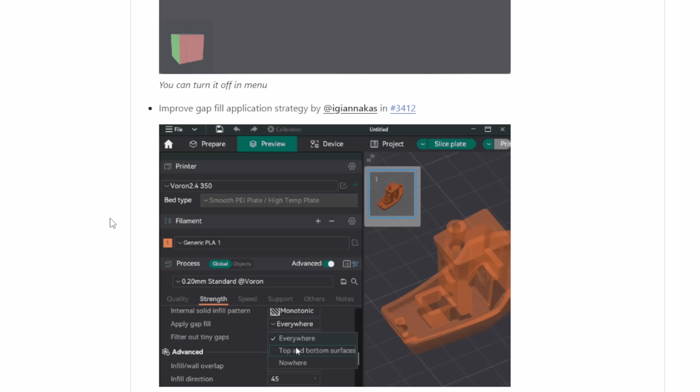So this is a first. We're doing Orca Slicer. If you don't know what Orca Slicer is, well, I hope you know what a slicer is. If you don't, it slices your models for 3D printing.

So you put an STL file in and it turns that into G-code for your printer. Time was, if we go back far enough, we have something called Slic3r, which then became Prusa Slicer when Prusa took over development.

Prusa Slicer is very much still a thing. Because of the way open source licenses work, the code of Prusa Slicer can be used by anyone, including other companies. That code was forked off to make Bambu Studio, which Bambu Lab machines use. And because of the way open source licenses work, that code can be used by anyone, including other individuals.

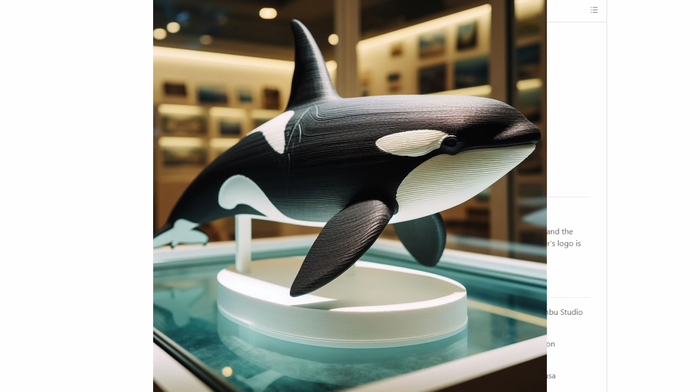And so SoftFever forked the Bambu version off, probably about a year ago or maybe more, into Orca Slicer. This is Orca Slicer 2.

It was in beta when I started writing this script and testing for it, but at the time of writing the script it was RC1, release candidate, and as I'm talking now, reading the script, it's actually now released. So by the time this video comes out, it might be Orca Slicer 4 or something. There's definitely a lot going on with Orca Slicer at the moment.

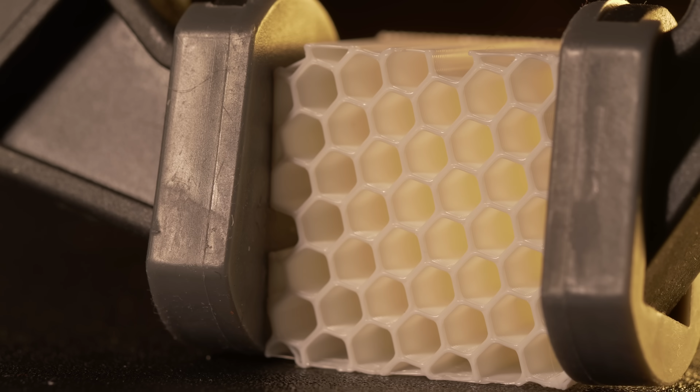Anyway, enough talk, because talk means editing, and I hate that. So let's get straight to the first cool Orca Slicer feature for version 2 that I want to cover, which is Space Bees. Kind of.

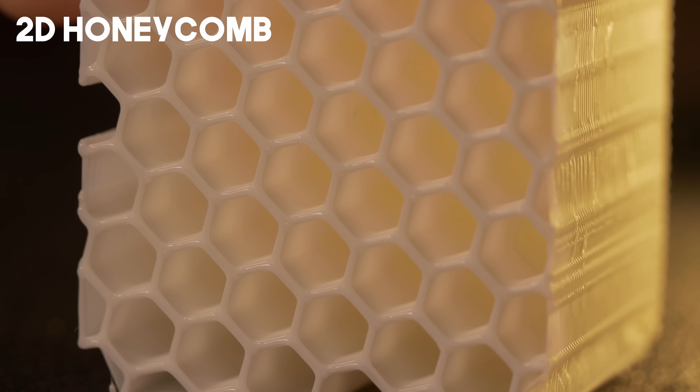It's 3D honeycomb infill. You see, bees don't make 3D infill. They make 2D hexagons, which are just extruded forwards. Obviously, if you've ever seen a beehive, you'll know that. So if you want 3D honeycomb, maybe you could take bees into zero gravity, maybe.

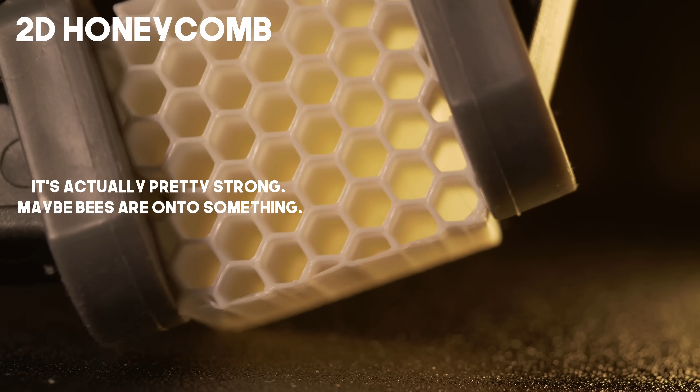3D honeycomb itself as an infill is not new at all, but it's been improved for this version.

So 3D honeycomb is kind of pitched as being equivalent to gyroid, or you might pronounce it gyroid. I pronounce it gyroid because I'm normal.

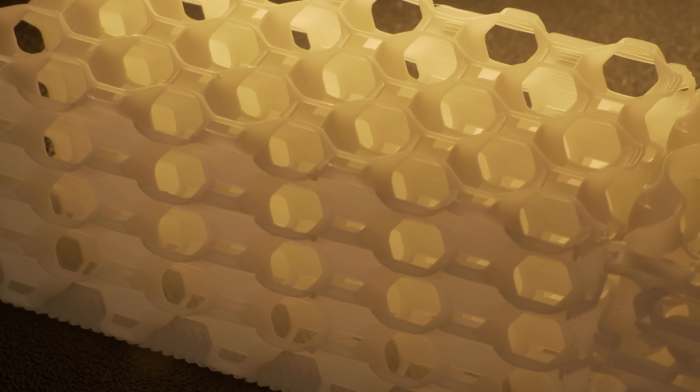This is probably not entirely a good comparison because gyroid is a minimal surface, and I don't think Space Bee infill is. Also, if you look down the middle, you can see it doesn't quite cover all the dimensions. You've got visible holes all the way through, compared to gyroid, which is sort of trying not to have that.

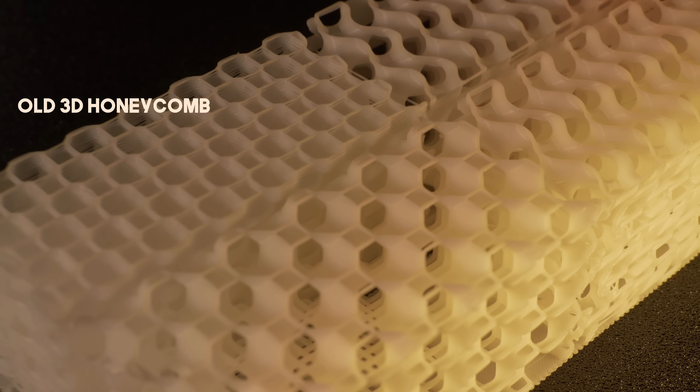Nonetheless, for most practical purposes, you probably won't notice the difference between gyroid infill and 3D honeycomb, and it prints faster. I think potentially it also prints without the your-printer-is-being-shaken-apart kind of vibes that you get with gyroid on newer printers.

I've noticed a lot with newer, faster printers, if they print infill quite quickly, it does sound particularly terrible, going at like 600 millimeters per second. Quite a lot of the time I've had to turn that down because it sort of feels like it's shaking the printer apart.

Next up seems to be scarf joints. This one is a can of worms and a half.

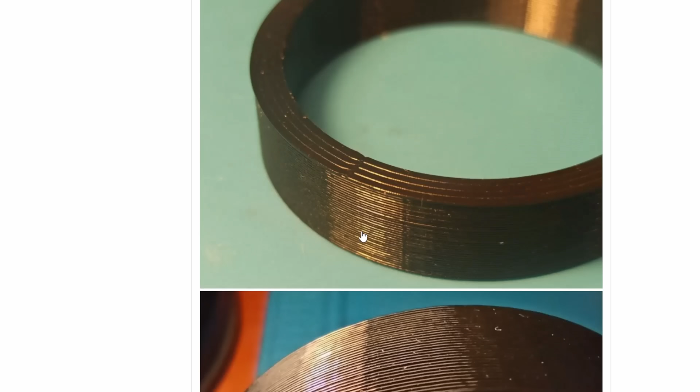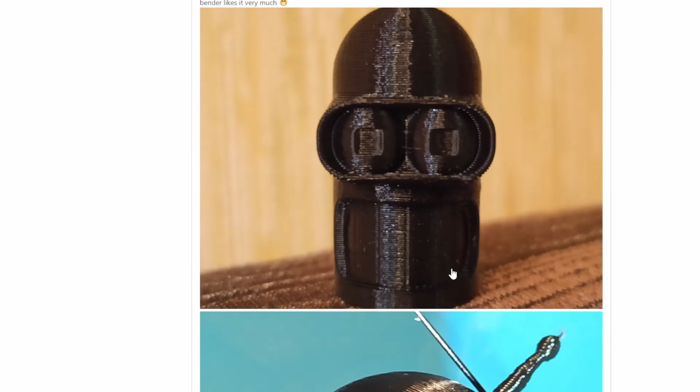Just trying to get my head around it took days and a ton of prints, and I'm not even close to the point where I would if I was making a video about scarf joints. I'm not at the point where I would present it because I don't feel like I've really got to the end of testing.

But I've got deadlines to get this video out, and I don't want to spend ages testing something that other people have already done, so I've stopped messing about with this, and I'll show you some examples. The basic principle is a scarf joint is an actual thing, at least in woodworking. If you Google it, this seems to have started with an issue raised on the Orca Slicer GitHub by user Vaguden. I'm sure that's pronounced exactly correctly. They explained how it works quite succinctly. If I get the right end of the stick, what you're doing is you're sloping up the extrusion.

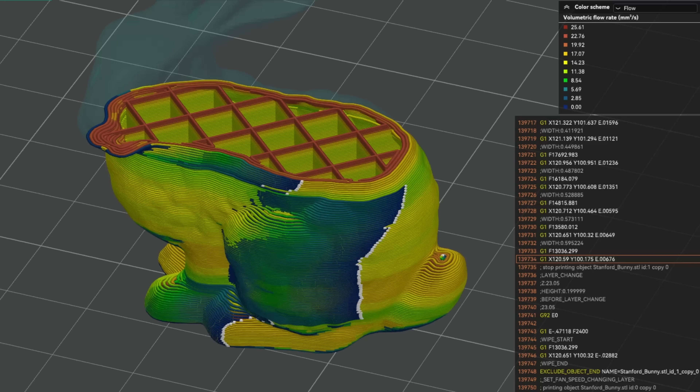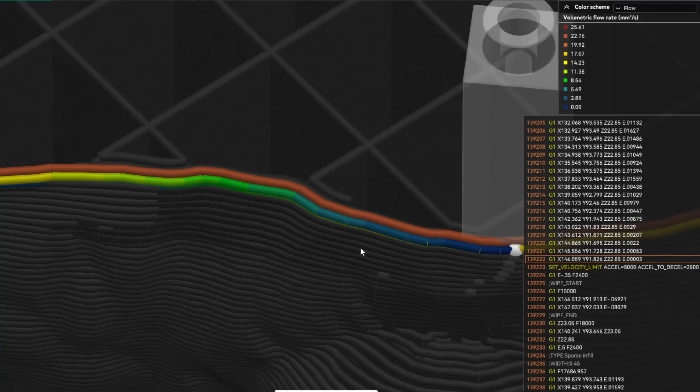And then you're meeting it again at the point where the line comes around and joins. So for a certain amount of the extruded line, which is a parameter you can change, it creates an overlap. The obvious problem here is that this is technically under-extrusion at the beginning of a line, and a lot of work has been done to make sure that lines extrude consistently. You've got linear advance or pressure advance. So yeah, maybe it doesn't make the actual wedge that you want, but it does seem to work.

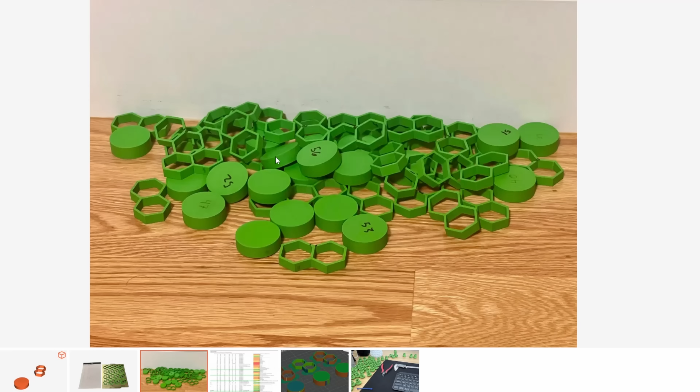It seems like a lot of people have been trying to tune this, and I'll link what I've got below in terms of the links to the people who've been doing this. I did some tests on it, as I mentioned. I have to say that using defaults as they come on Orca Slicer, that did not impress me. I couldn't really see a lot of difference.

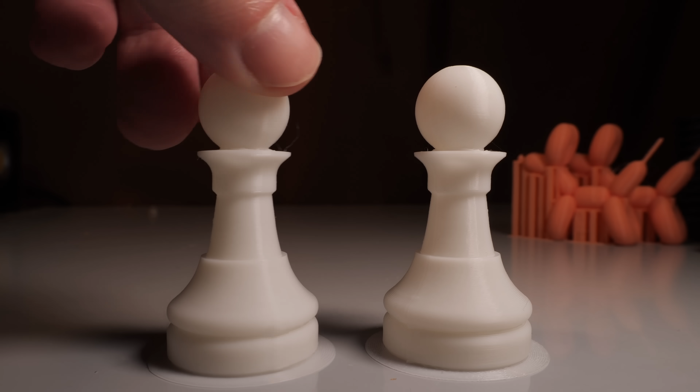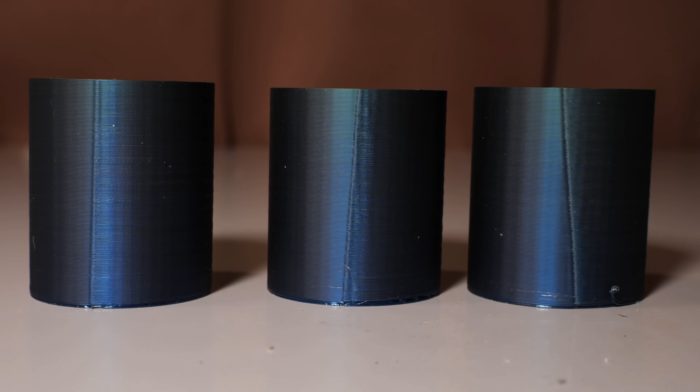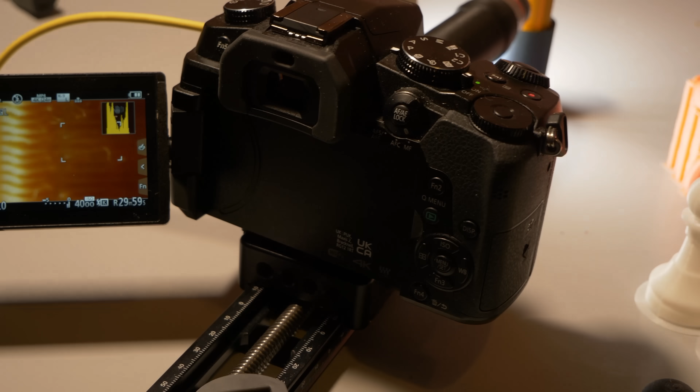Also, I want to see it close up because I want to see what's going on here at the joints. If only there was a way to do that.

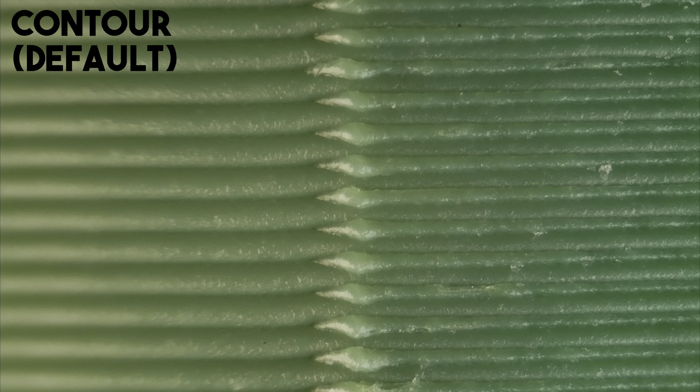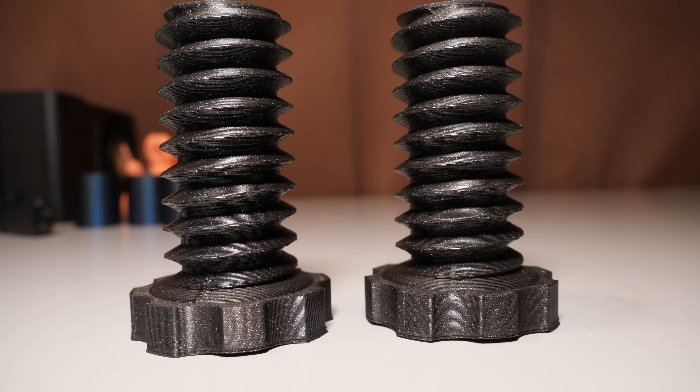Scarf joints is a huge your mileage may vary. I'm yet to be convinced it's the game changer it initially appears to be, because it seems to have to be tuned quite heavily. But who knows? I'm sure that kind of thing was said about retraction at one time, and we don't even give that a second thought now.

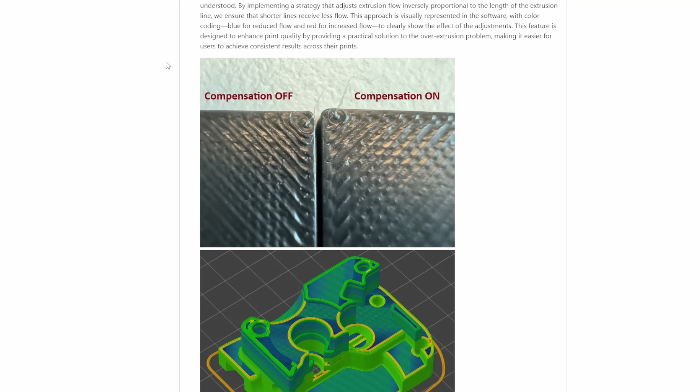Speaking of tuning, this is something I actually came across in real life myself not too long ago. I was trying to help a friend on an issue he was having with trying to tune ironing on a part, but it wasn't behaving as expected, and we narrowed it down to this issue.

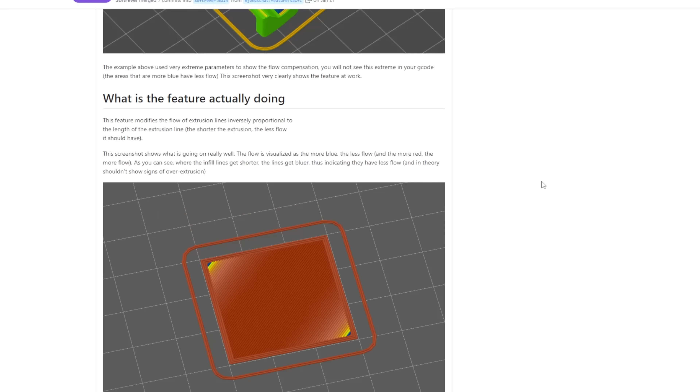I'm not really sure whether we don't understand why it happens. I sort of think I see why it happens. My theory is that it's related to the overlap volume. When you join infill and edges, some of where the infill meets the edges has to overlap, otherwise it won't lock together. If you have a longer line, there's more time to balance this out. On a shorter one, the overlap means a lot more material is being put in a smaller space. Either way, this flow compensation is an attempt to fix this issue, whatever the reason.

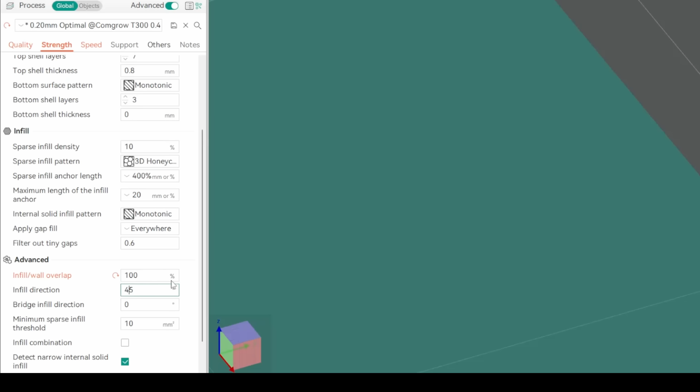And it becomes yet another parameter to understand in the slicer. Slicers are getting more complicated, this is a fact, but there you go. I guess it keeps me in work.

Ultimately, does this setting work? Yes. Does it need tinkering with? Yes.

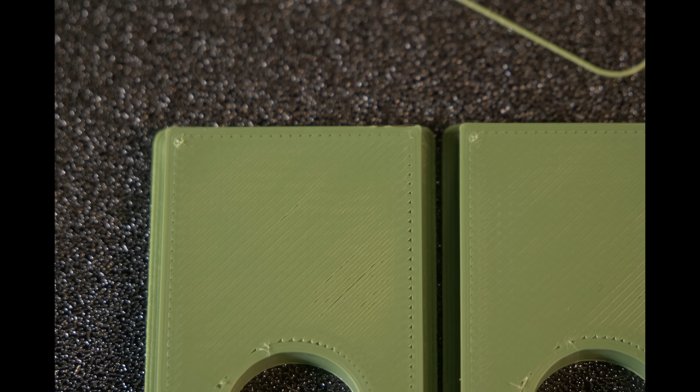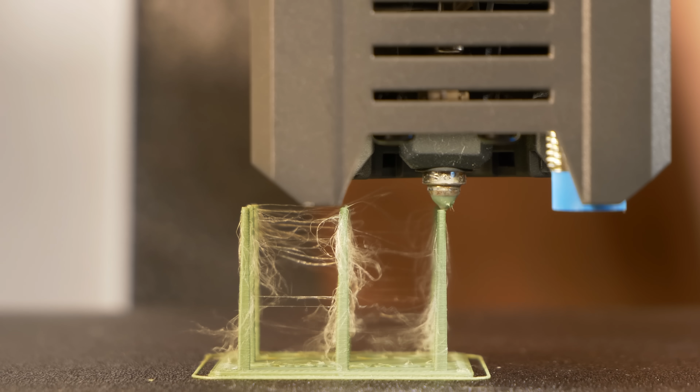Now, getting seams and top layer looking perfect is one thing, but if your filament is wet, it is pointless trying to dial all this stuff in, because the print quality will suffer visibly and minor quality tweaks will be the last thing you're worried about, which is a decent segue to the sponsor of this video.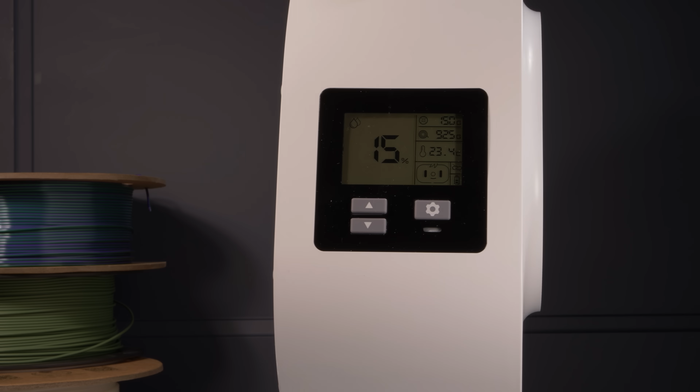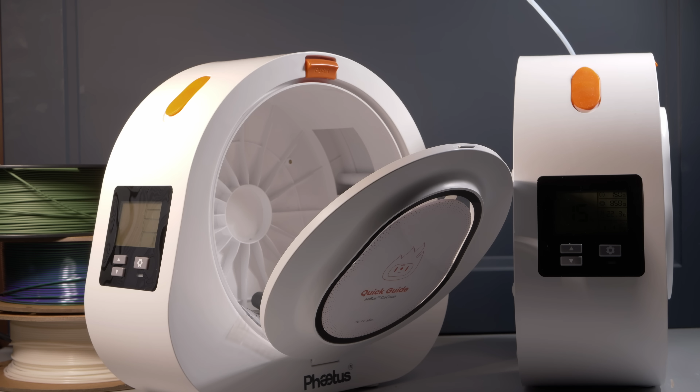This is exactly what I want to talk about. You see, a lot of people misunderstand filament humidity, and it's forgivable because it's a complicated topic, so much so that this is in fact the second rewrite of me trying to explain this particular section. There is one thing that keeps popping up on the internet and it bugs me, and that is the idea that you can't dry filament with desiccant.

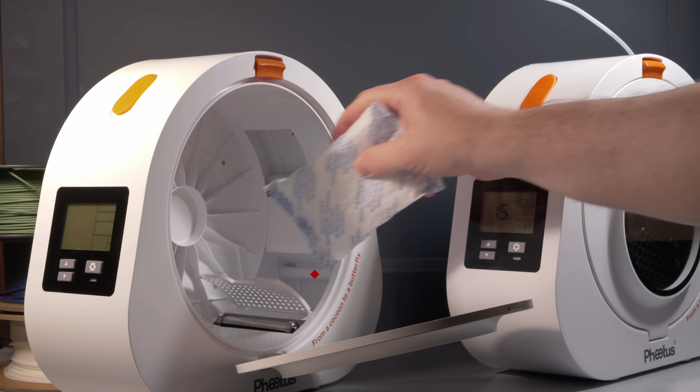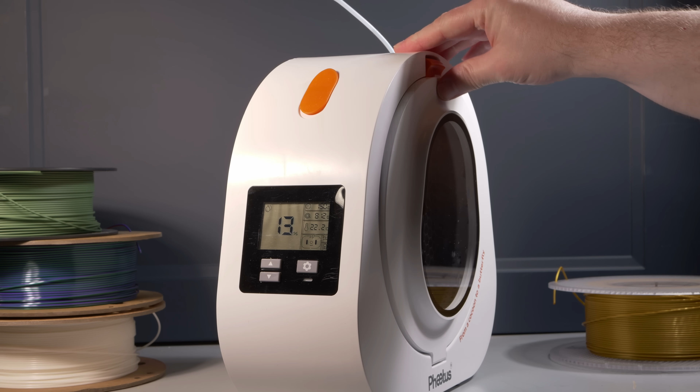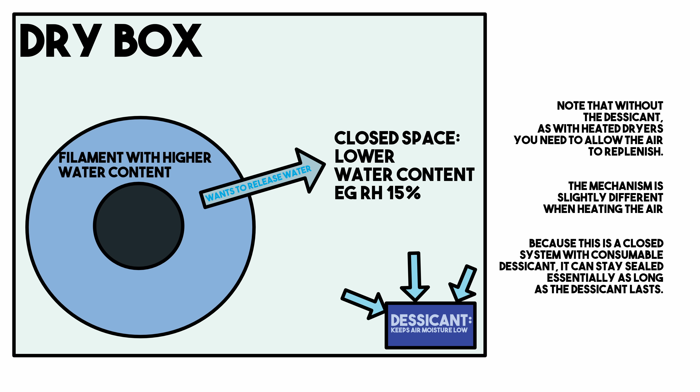If you put desiccant into a sealed container of air, it will adsorb the moisture from that air, leaving it at a lower moisture content. I think we all understand that, even though that's the hardest bit to actually explain, so I won't. If you now introduce a wet filament that became wet from the environment into that sealed box, you now have moisture in that filament that wants to leave and maintain the equilibrium in the box. So some of that moisture will leave the filament and go into the air inside the box. Guess what? The silica gel will then suck that out of the air too, and then you get the idea. You're creating a sort of moisture conveyor belt in the box from the filament to the air and from the air to the silica gel. How else do you think it would work? Anyway, this is exactly the technique the Cocoon filament dryer employs.

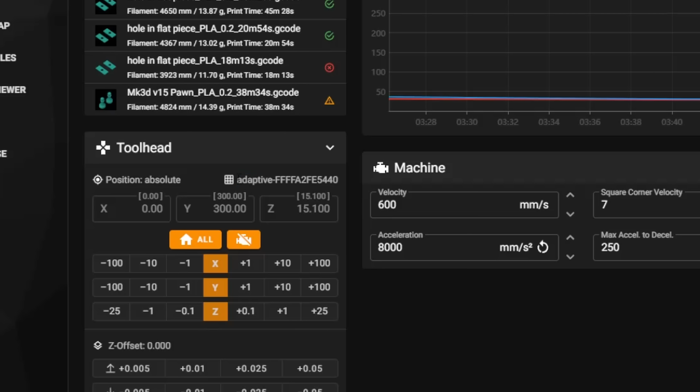Anyway, let's get back to Orca Slicer. Klipper recently implemented adaptive mesh. It's not as complicated as it sounds. The basic principle is that you can generate a bed mesh for just the area you're planning to print on. Now, Prusa already does this. I don't know off the top of my head who came first, but I think the rule of thumb is that if Prusa ever did anything, we generally say that Prusa invented it, so we'll go with that.

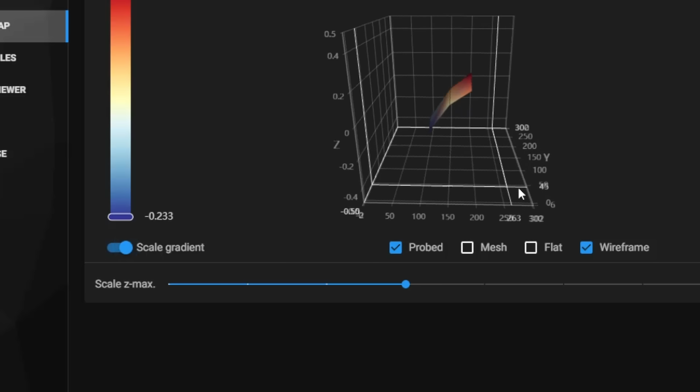Adaptive mesh is also a thing in Marlin and RepRap firmware, and I'm not covering that here. The video is long enough as it is. We'll just look at Klipper. To get adaptive bed mesh working, your Klipper install needs to be pretty recent, I think 0.12 or beyond, so that means quite a few production machines are out as they ship with surprisingly old Klipper installs. But don't worry, Sovol has your back. Both the Comgrow T300 here and the super secret SV08, you have no idea how many times I had to say that, they both run adaptive leveling by default. You have to update the T300 if you haven't already, but it does support adaptive leveling.

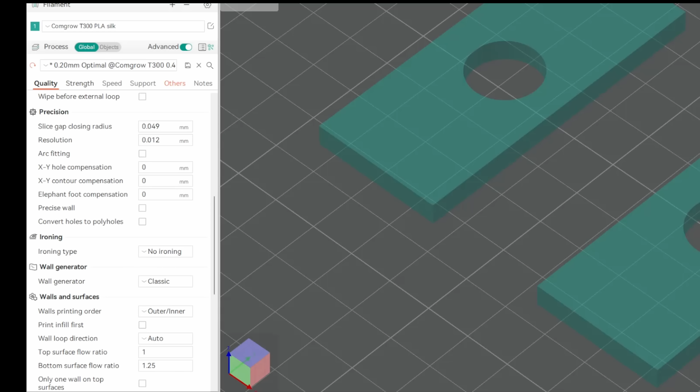To get adaptive mesh working requires you to align several things, including the version of Klipper, the start macro, the fairly recent cancel objects function, the start G-code in the slicer, and a random setting shown here. I think that's everything. Prusa Slicer and Cura do also support adaptive bed mesh. I will mention that. It's not an Orca Slicer only thing.

If you want more info on this and how to set it up, including how to set it up in Prusa Slicer and I think also Cura, I'll point you at a video Modbot made where he details the exact process in way more detail than the few seconds I've given it here.

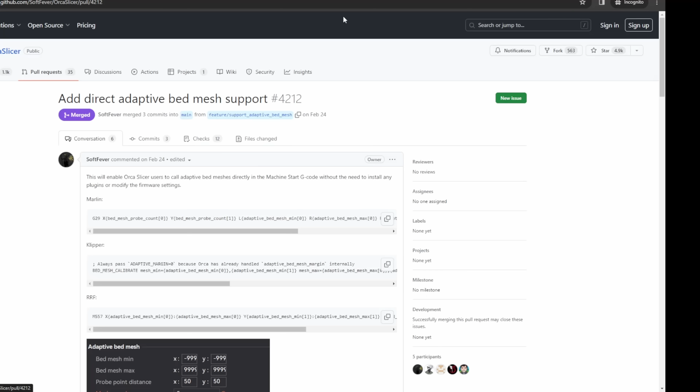What's new in this Orca release is not a lot, actually. It took some poking around, but as far as I can tell, it's just some variables that pass through from the slicer to Klipper, which would normally be defined in the printer config. I could see why margin would be useful as a parameter you change per print—some prints might need a margin. I can't think why off the top of my head, but it could be useful. That's effectively what this change allows you to do.

I'm glad the next feature is a lot easier to explain—I can do it in one sentence. There's a tick box to remove the Bambu stuff from Orca. This is really handy if you don't use it, because I think it looks a bit cluttered and weird if you aren't a Bambu user and have never used a Bambu machine, and you're faced with the Bambu plugin. It does look weird.

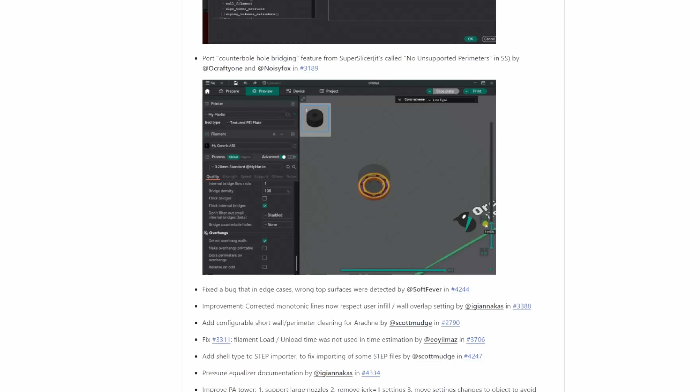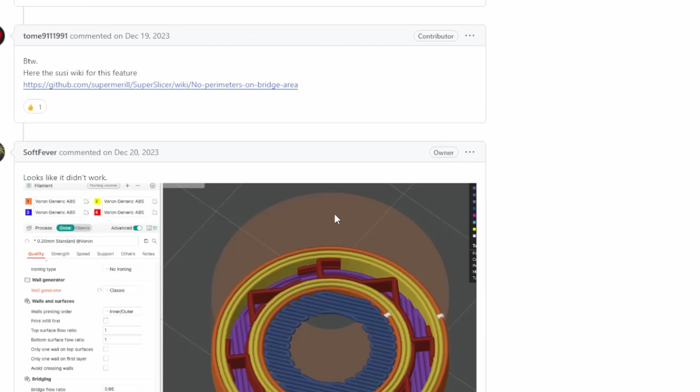The final feature I want to look at is called counterbore hole bridging, which doesn't exactly flow off the tongue. This is a problem that's most easily demonstrated rather than explained. The print you can see here is impossible from this orientation. But the smart idea that SuperSlicer—not Orca, SuperSlicer—apparently implemented way back in 2019 basically consists of the idea that if you print one single bridging layer, you can just punch through it at the time of using the part. I'm surprised this wasn't particularly well known, but I guess it highlights how niche SuperSlicer was back then.

That's not a diss. Maker's Muse made a video on this, and I too have covered similar sacrificial bridging techniques a while ago in a video myself.

In fact, we did some digging on Discord and found Tommy. Tommy made a blog article on this in 2017, or possibly before, and Hackaday picked it up. In the comments to that article, someone linked nophead, one of the big names in 3D printing historically—he did something similar to this in 2014. So I think it's one of those things that just keeps getting rediscovered, because it's kind of semi-obvious, but only if you think about it for long enough.

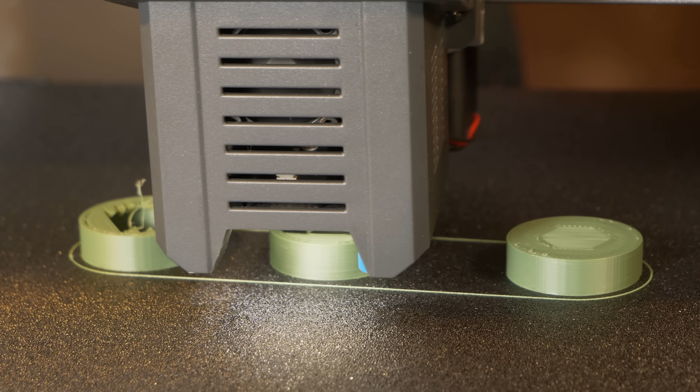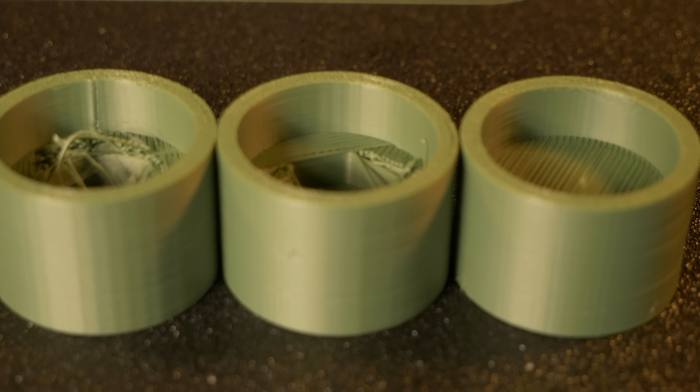Anyway, what this means is there's no longer a need to design around this kind of concept in CAD, because it's now in Orca Slicer, and it should be pretty useful. Although you'll have to comment below on whether you'll just use supports or change orientation instead. I guess, like most things in practice, it just depends on the part.

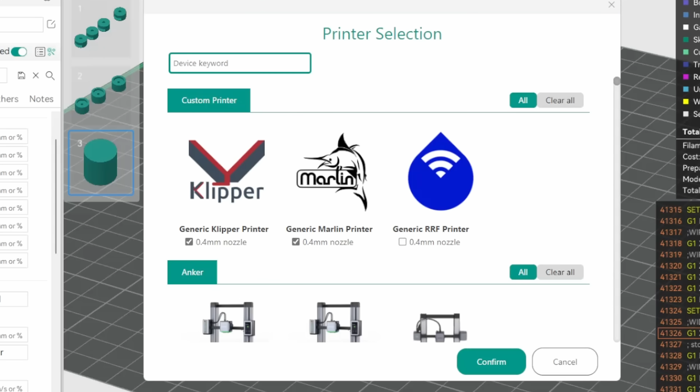There's a whole ton more stuff and fixes in Orca Slicer, and I've never actually covered this slicer before, even though I've used it for a while, so I'd recommend checking it out if you haven't already—especially if you come from the Bambu or Prusa Slicer ecosystem, because it should be fairly intuitive, especially from the Bambu side of things. There's a pretty big list of printers supported now, and it's good to see manufacturers getting involved. As you can see with Sovol, for example, they've supplied their latest printers with Orca, and you'll see in my SV08 video coming very soon that it works out of the box with Orca.